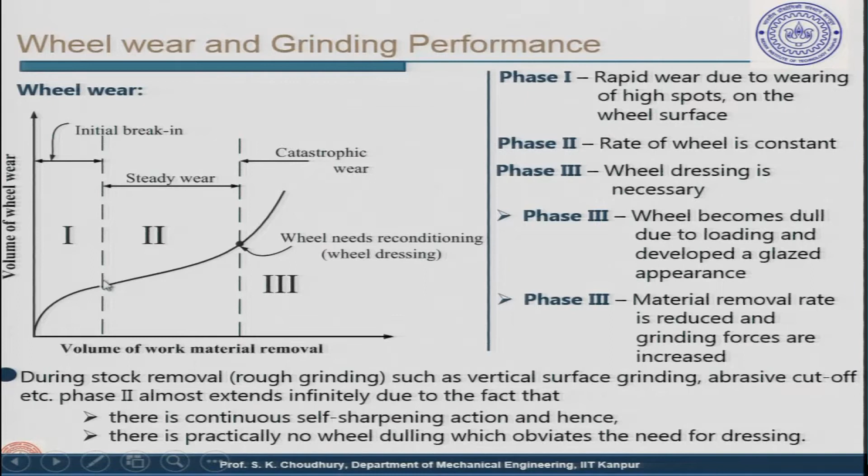Now, these explain that there is a self sharpening. What is the self sharpening? And there is practically no wheel dulling in this steady wear. These things have been discussed. Then we started discussing in our last session how the grinding wheel wears out.

So, these are the grains which are bound together, and the entire thing is a grinding wheel which is in contact with the workpiece, and it rotates along with the VF, and the material is removed from the workpiece surface. As shown here, each grain removes a small amount of material in terms of small chips. When these grains rub along the workpiece and remove material, there are three types of wear that I mentioned in our last session. So, let us see them in more detail.

First is the attritious wear. Attritious wear occurs at the grain workpiece contact surface. I have shown you earlier in the last session that at these contact points, where the grain is in contact with the workpiece while removing material, it gradually wears out. This is the gradual wearing away of the sharpness of the cutting points, resulting in the formation of wear flats on the grain tips, as shown here, where a kind of flat is formed.

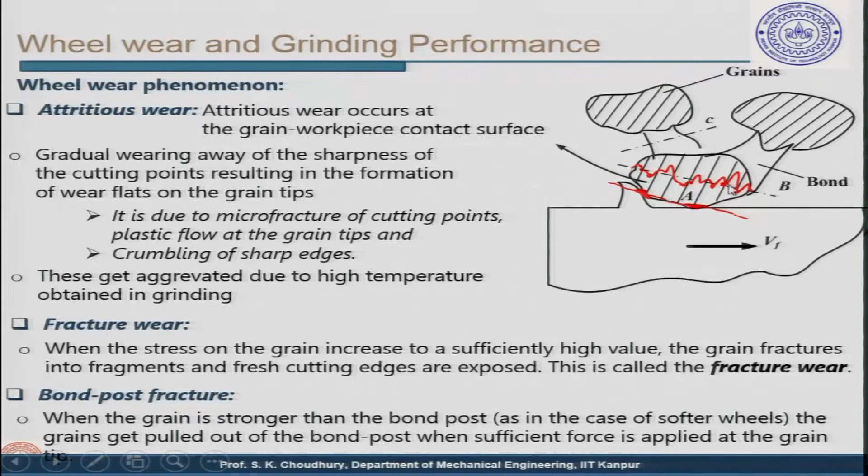Now, glazing occurs when worn abrasive grains are not fractured away or dislodged from the wheel. As I said, if it is not getting dislodged when it is worn out, then of course, I am repeating, the glazing occurs. All right, these are some experimental results.

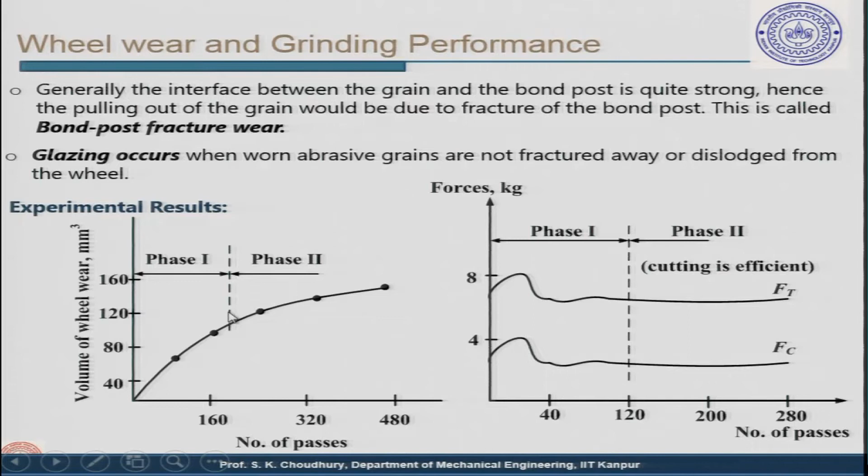I am not going into these details here. Now, let us see in grinding what happens as the temperature rises. So, this is the thermal analysis, and this is very important because the grinding temperature has to be assessed. I am giving you a preamble on why this temperature model is important in case of grinding.

In case of grinding, measuring the temperature by any device is difficult, because the process is very fast. There is chip flowing, and then there will be sparks because of the small chips burning. So, therefore, there is some sort of analytical model by which we can actually assess the temperature which is occurring during the grinding process.

So, why is it important? If we can assess analytically the final equation of the grinding temperature, meaning the parameters on which the grinding temperature will depend, then we will have full control on the grinding temperature. We can control those parameters or variables, and by controlling them we can actually decrease the output temperature of the grinding process.

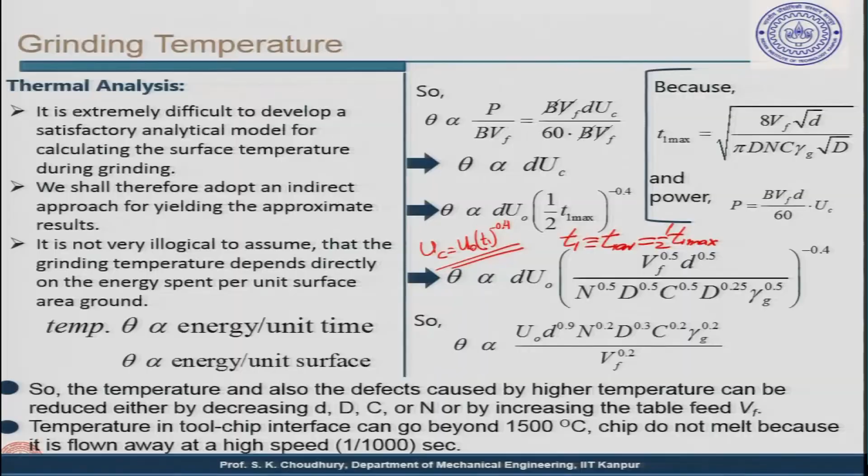Now, I hope it is understood that these are the parameters on which the temperature of grinding depends, and therefore, we have a possibility of regulating the grinding process so that the temperature is within our desired level, so that there is no thermal deformation of the material being ground. This is important because normally the grinding process is done after heat treatment. And after heat treatment, we normally find that some of the surfaces are distorted because of the high temperature involved in the heat treatment process.

So, to smoothen those surfaces and to get the accurate surface that is desired, we normally perform the grinding process. Therefore, we cannot afford further surface deformation because of the grinding process. And further deformation can come either because of very high force involved in grinding, or very high temperature occurring during grinding. So, what we have discussed is that grinding temperature can be reduced by manipulating those 5 parameters.

Now, apart from grinding, in abrasive processing there are processes like honing. This honing process is used for proper finish. So, it is not so much to remove excess material, but basically for removing the undulations after grinding, if any. Undulations means the surface roughness, asperities, let us say burrs. Now, to remove them is very important, because let us say we have, for example,

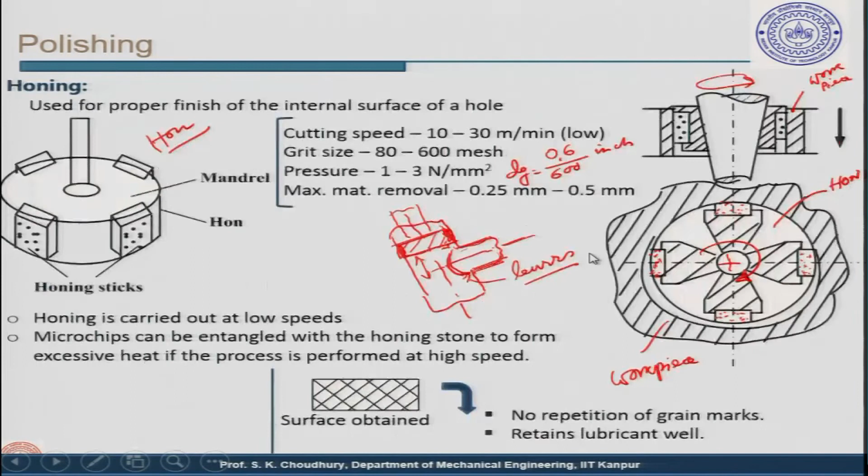Okay. Now, in case of lapping, we have hand lapping, as we said, where you put the part on the plate, and the plate once again is a soft material, at least softer than the part. Then you hold the part by your fingers, this is hand lapping, and move it in a path of 8 on this, with a bit of pressure, and I am coming to that pressure and all those parameters. Okay.

Now, it can also be machine lapping. In case of machine lapping, normally the lapping is made for small parts. It can of course be a part which is stationary, which is relatively bigger, like I said in case of automobile cylinders. It can be hole lapping, or it can be shaft lapping. So, for shaft lapping and hole lapping, you hold it with that paste, and then you can go forward and backward, and you can rotate the shaft.

So, it will be actually lapped, kind of a polishing. Similarly, for the hole lapping also, you can have the lap inside and then rotate the cylindrical part, so that the internal hole of this can be polished.

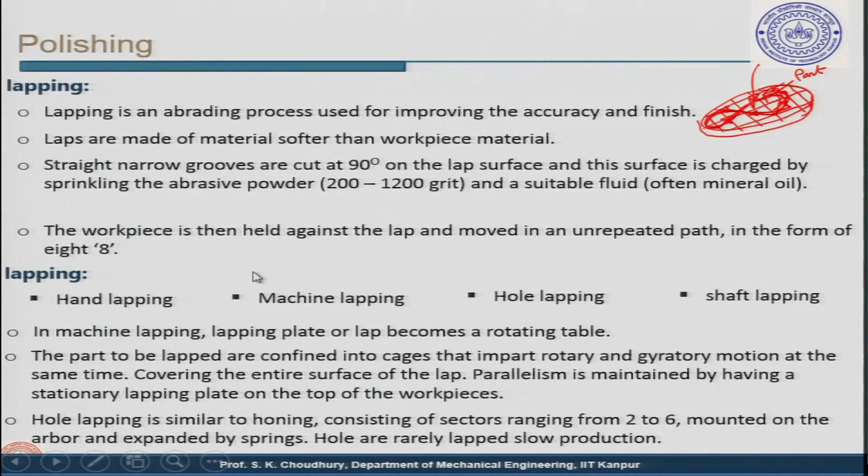Here we will stop discussing the abrasive machining processes, and next we will be discussing the economics of machining, because if you remember, initially we said that the idea of producing a part is to make the part with the right accuracy, shape, size, finish, and of course, at the right cost. So, the objective of machining is to produce a component of required dimensions and surface finish at minimal possible cost.

Now, the factors that can be varied during the machining operation to change the cost are speed, feed, depth of cut, tool and work materials, tool geometry, cutting fluid and so on. Our idea will be to have a minimum cost of the product, so that we can compete in the market. So, the components we have found are the cutting speed, the feed, the depth of cut, or the cutting parameters overall, tool and workpiece material, tool geometry, cutting fluid and so on.

So, you understand that if we have a higher cutting speed, for example, the time taken is less, more products will be made within the given time, and the product cost will be decreased as a result. Similarly the feed, the depth of cut, and the tool and workpiece material, because if the tool material is very costly, the final product will be costly. Similarly, if the blank, the basic material, is costly, then you cannot afford to produce a component at a lower cost.

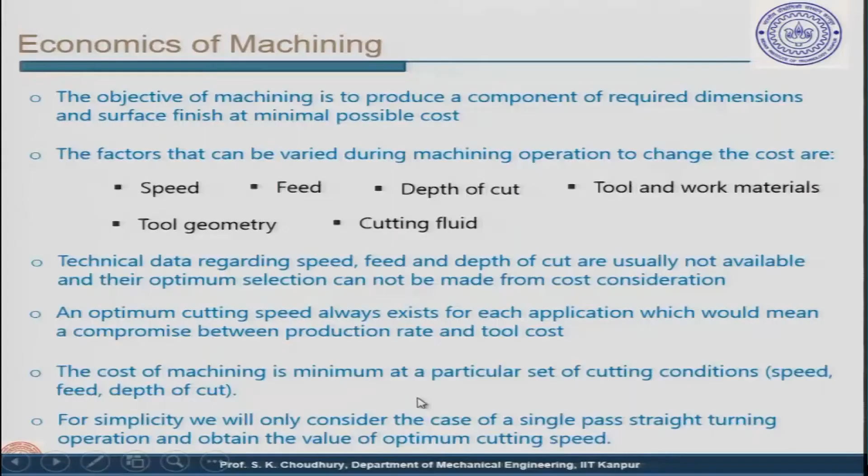Now, let us assume the simple turning operation of a cylindrical bar, where the diameter is capital D and the length is small l. So, we are turning that. To do that, the important cutting parameters are the cutting speed, feed and the depth of cut. Now, the technological aspects include what will be the surface finish, what is the power requirement, what are the forces acting and so on. So, these are the technological aspects.

Now, economical aspects we have not discussed so far, because we have discussed the important cutting parameters: cutting speed, feed, depth of cut, in the tool life and tool wear section. Surface finish we will be discussing, power requirement and force we have discussed; these are the technological aspects. Now, in the economical aspects, we have the minimum production cost criteria, maximum production rate criteria and the maximum profit rate criteria.

What is said here is that we will have a particular optimum value of the cutting speed or feed or depth of cut. With that optimum cutting speed, we can have the minimum cost. Similarly, if we want the maximum production rate, there also we can get an optimum value. But these two optimum values will be different. For one value of the optimum speed, we can have the minimum cost, but we may not get the maximum production rate using the same optimum cutting velocity. Same thing happens with the feed and the depth of cut, and with the same values for which we get the minimum cost and the maximum production rate, we may not get the maximum profit rate.

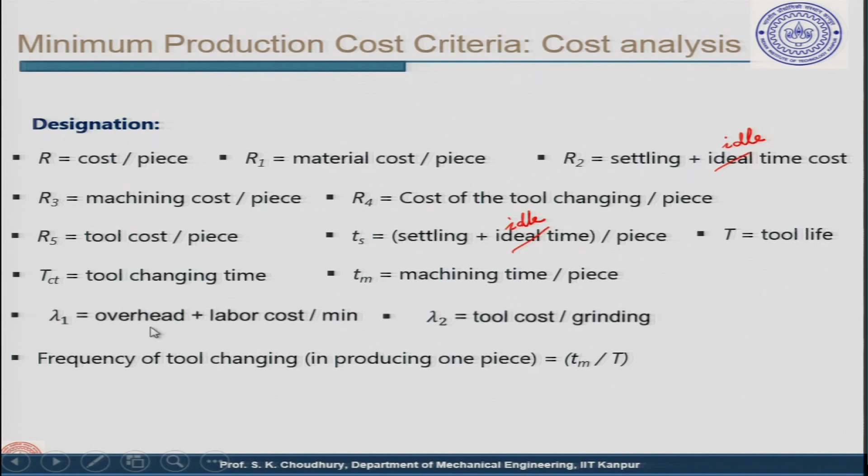So, therefore, it is also constant, and the setup and idle time cost will be equal to what you are paying, that is lambda 1, the overhead plus labor cost per minute, times how much time you are spending for setting up and idle time. So, lambda 1 multiplied by this time gives you the setup and idle time cost.

Similarly, the machining cost is R3 here, and R3 will be given similarly by the machining time Tm and how much you are paying for that machining time, and this payment is the labor cost and the overhead cost together, as I explained. Now, Tm is the machining time.

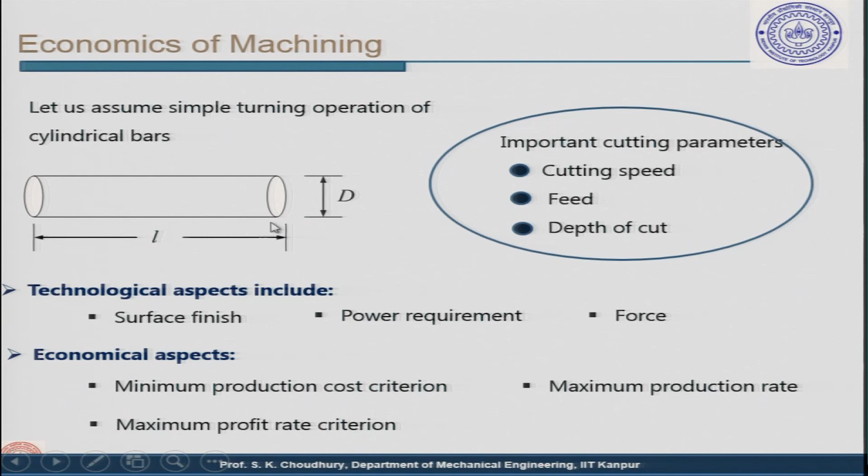Tm, as we have already derived earlier, is given by L, the length of the part, here we are taking capital L as the length of the part, divided by f and N. So, let us say this is the cylindrical part, the length is L, the diameter is D, the rotational frequency is N, and f is the feed.

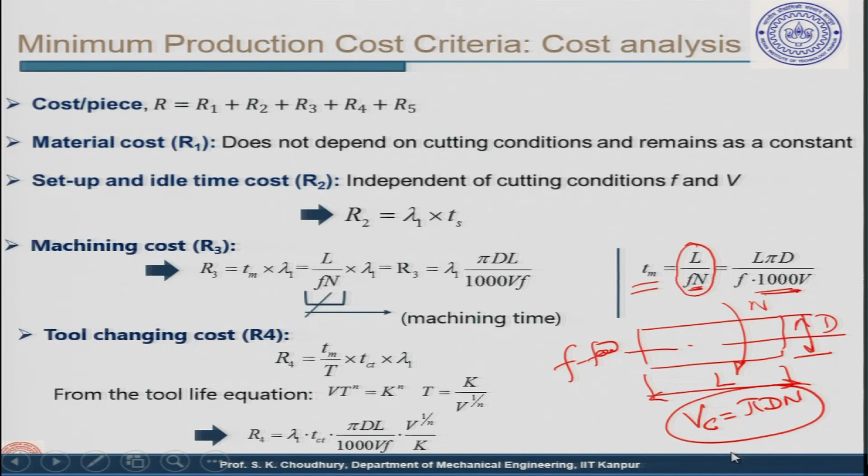So, Vc, the cutting velocity, is pi D N divided by 1000 for the unit conversion. So, L by fN is the machining time. Here N can be replaced by the cutting velocity with this formula, and how to proceed further we will discuss in our next session. Thank you for your attention.